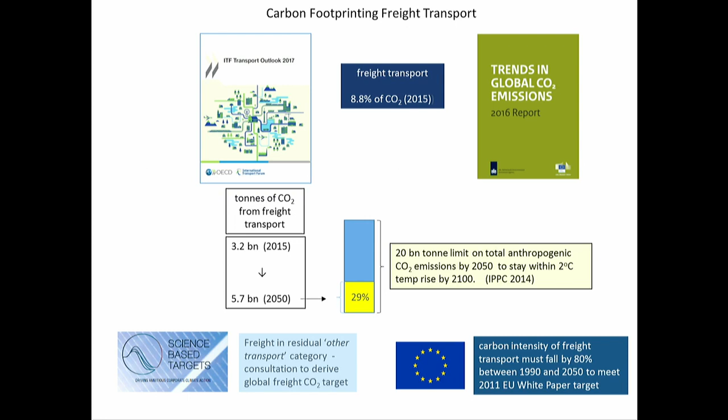Here in Europe, however, the 2011 White Paper on Transport set targets for decarbonising transport. Now, if the freight sector is to meet those targets at an EU level, then that will require an 80% reduction in the carbon intensity of freight transport between 1990 and 2050. And that is going to be a very tough challenge to meet. So that's the background, in a sense, to what we're talking about in this session.

Those of you who work in this area will know that there are various analytical frameworks that you can apply to try to determine how you decarbonise freight transport. The one that we tend to use is the one on the right there, which we call the Green Logistics Framework, which suggests there are 5 things you can do to decarbonise freight transport. You can reduce transport intensity, just reducing demand for freight transport. You can shift transport mode, you can improve vehicle load factors, you can improve energy efficiency, or you can switch to lower carbon energy.

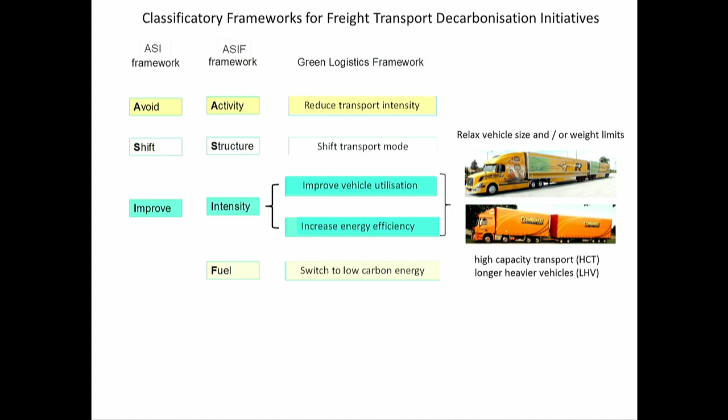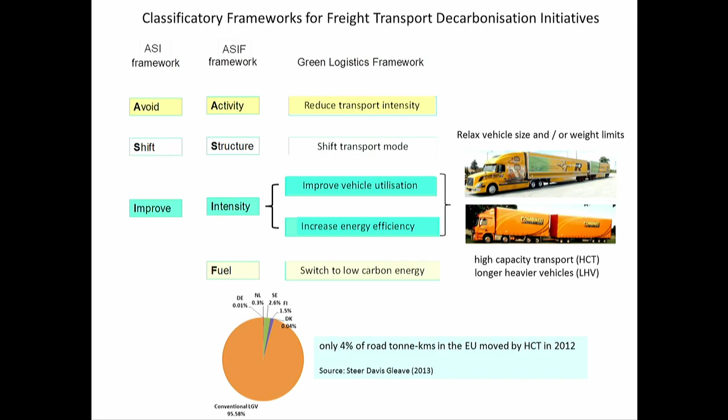Now, what we're talking about this afternoon, high capacity transport, really relates to two of those: improving vehicle load factors and also improving overall energy efficiency. The latest figures I've seen for Europe suggest that only about 4% of road ton kilometres move by high capacity transport in longer and heavier vehicles.

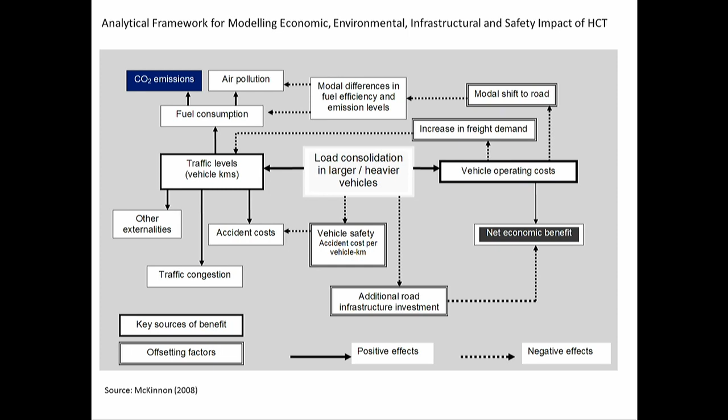So there's a big potential to increase that figure. Some years ago, I developed an analytical framework that you can use for assessing the costs and benefits of increasing the maximum size and weight of trucks. It's a rather complicated framework. Thankfully, this afternoon, I'm just focusing on one box in that framework in the top left-hand corner, just looking at CO2 emissions. So I'm not saying anything about other pollutants, about safety, about risk, and so forth.

So what could the contribution of high-capacity transport then be to the decarbonisation of road freight? There are various companies that make claims. A trucking company in the UK that's developed a longer, heavier vehicle claimed you can cut your CO2 emissions by between 8 and 16%. There have been larger scale trials in the Netherlands and in Germany, and they have been very positive. I've extracted some quotations from the relevant reports.

In the case of the Netherlands, for example, they said that for road transport, this is an important innovation in the effort to reduce CO2 emissions. And then more recently, as I'm sure many of you will be aware, the German government has approved gigaliners, longer and heavier vehicles, for general operation in Germany. And the study done by BaST again partly justified that decision on the basis of the carbon reductions that can be achieved.

The International Road Transport Union, in its report recently on the commercial vehicle of the future, makes some projections about the extent to which high-capacity transport can cut carbon emissions in the European road freight sector. So they reckon that by 2030, HCT could achieve about a 3.5% reduction in CO2 emissions, and potentially by 2050, a 7.5% reduction in CO2 emissions. Not huge, but nevertheless a significant contribution.

And then in the UK, a research centre that I was involved in, and David Cebon, the director of the centre, is here, did a project for the Committee on Climate Change in the UK, looking at all the ways of decarbonising road freight transport in Britain up to 2035. And they reckoned that by the early 2030s, up to about a quarter of the carbon savings would come from the use of longer and heavier vehicles. So a lot of evidence to suggest that this is a very positive way of decarbonising freight transport.

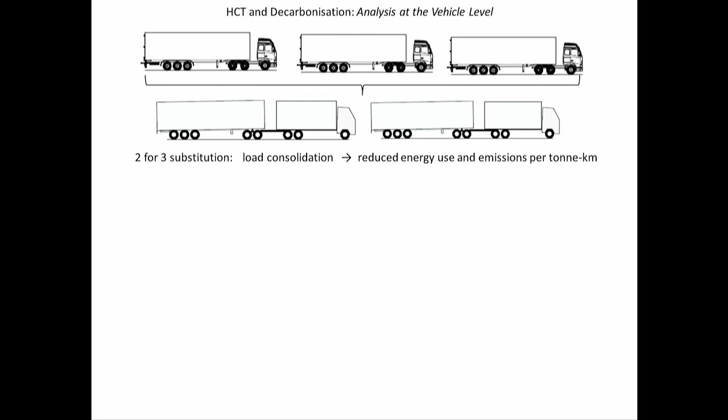Now, if we simply focus on the vehicles, things are relatively simple. I'm going to be talking mainly about the 25-metre longer, heavier vehicle with a carrying capacity of 50 or up to 60 tonnes. That would give you a 2-for-3 substitution: we can replace 3 trucks with 2. And that translates into greater load consolidation and improved energy efficiency per tonne kilometre.

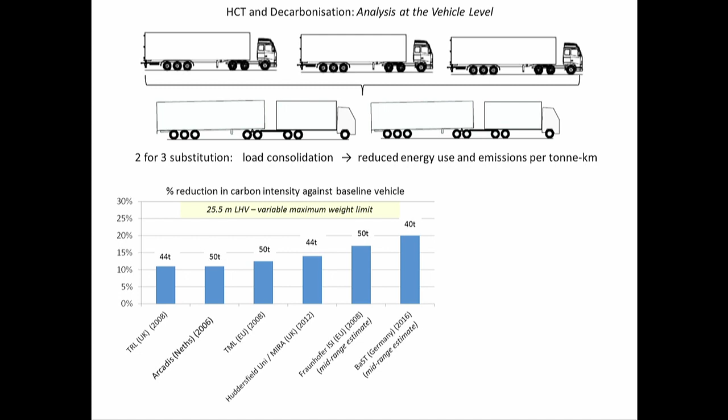If one reviews the literature in this area, again, there have been studies done in various countries, you can see that that would save between 10 and 20% of fuel consumed and also of CO2. It partly varies because different countries and different studies have used different maximum weight figures for these vehicles. So it's very hard to compare much of the data in the public domain because different methodologies were used, the geographical areas differ, some of the assumptions made about price elasticity. So it's hard to make an overall conclusion.

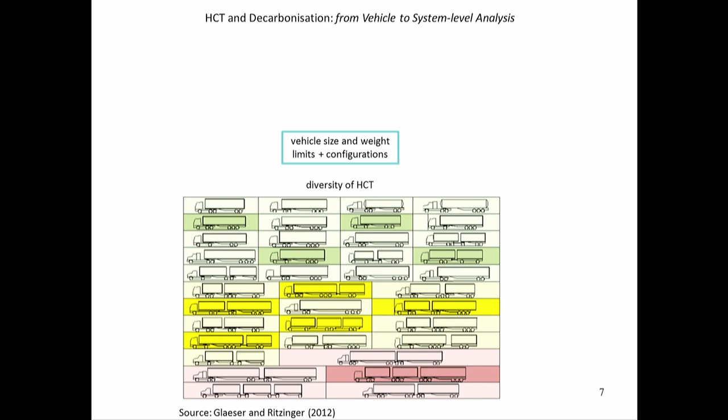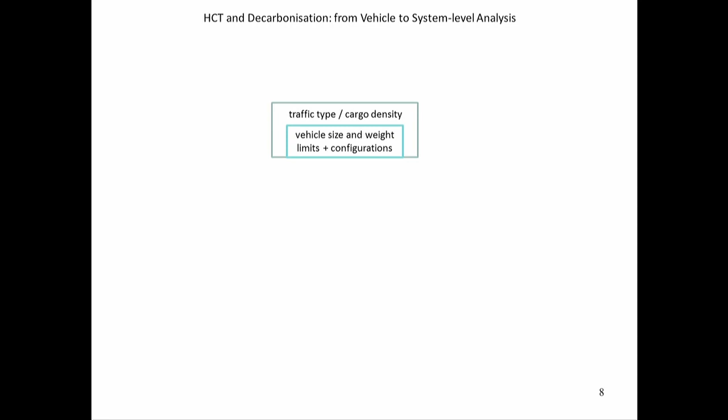But the other challenge is moving from a vehicle-based perspective to a system-wide perspective. If you allow this at a country level, what would be the macro-level impact? Why is that difficult? Partly because of the diversity of longer and heavier vehicles, a very heterogeneous set of possible vehicle configurations. The other problem is that the freight varies a lot. One of the key determinants of the carbon benefits you get is the density of the freight that's being moved and how that relates to the size and the weight restrictions as well.

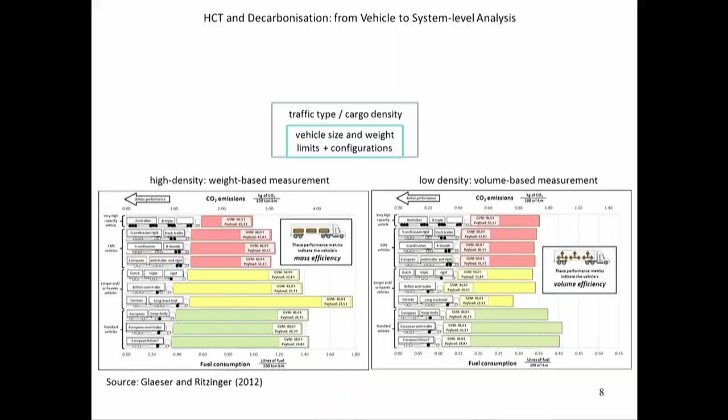Again, interesting work has been done in this area, partly in connection with the last OECD study on this subject, which was published back in 2009, where they looked at 39 different configurations of truck. Some of them the standard workhorse vehicle at the time, others high capacity or even very high capacity vehicles. John Woodrooffe, who will be speaking in a few moments, was one of the contributors to that study. They also came up with a nice metric, a composite measure of freight density that took account of both the cube as well as the weight.

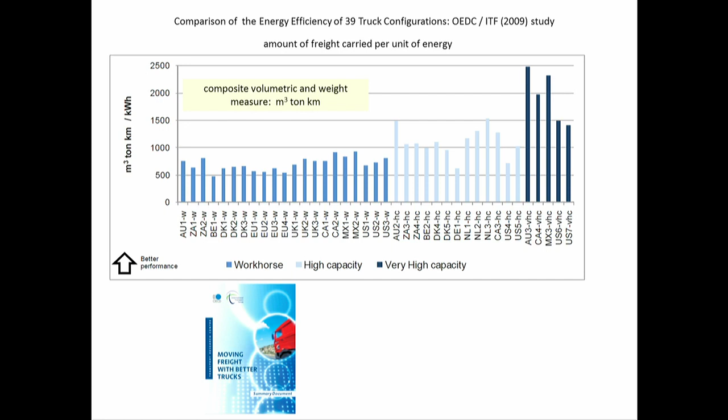This graph shows the energy efficiency of these different vehicles, and the capacity of the vehicle increases as you move from left to right. It shows quite clearly that the higher capacity vehicles deliver greater energy efficiency and reduce carbon emissions per ton kilometre.

The other problem you have in going from a vehicle perspective to a system perspective is the geography, because it's generally accepted that these longer and heavier vehicles will move on a more restricted road network. There's a possibility therefore that the journeys these vehicles make will be more circuitous. So if there are additional vehicle kilometres to be run, that will partly erode some of the carbon benefits.

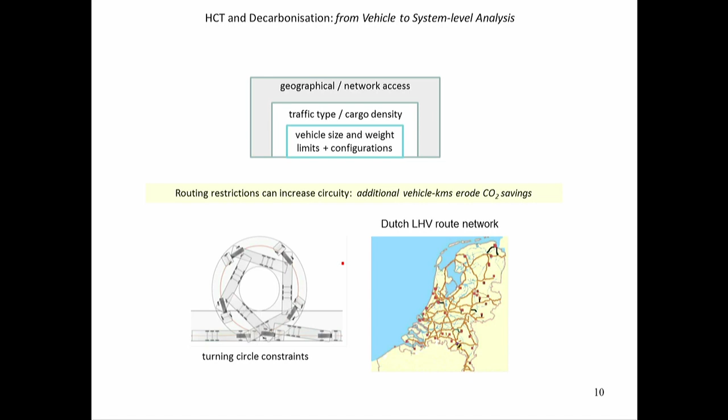So therefore we have to look at the issue of network access, which I think Chris will be addressing in his presentation later. Then pulling back further, in going to the system, we have to look at the freight market and the level of adoption of these vehicles, and also their impact on freight modal split.

Because, as I'm sure you're all well aware, these vehicles will make the movement of freight by road cheaper. It will improve its competitiveness, and therefore can divert freight from other lower carbon transport modes like rail or water.

I was involved in a study in the UK that looked into longer, heavier vehicles back in 2007, 2008. And we did a lot of modelling at that stage of the impact of longer and heavier vehicles on the freight modal split in the UK, mainly between road and rail.

And the results of that analysis depend very much on the elasticity values, the cross-modal price elasticity values factored into the model. But there's no denying that there will be some erosion of freight traffic from alternative modes.

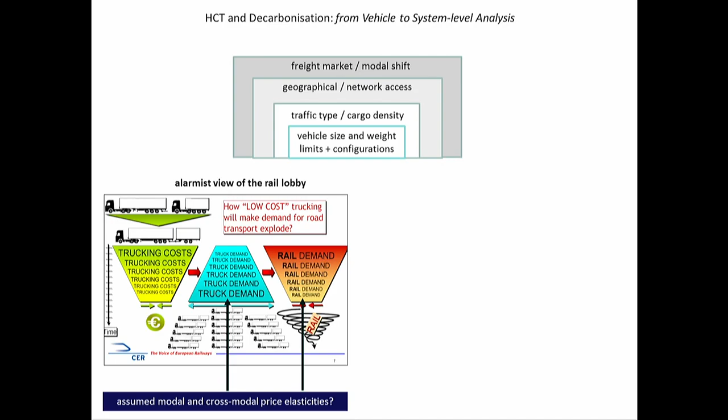Whether it will be as bad as the railway sector would like us to think is another matter. Clearly there's been a lot of lobbying against high-capacity transport by people on the railway side. I'm sympathetic to many of those arguments, but my feeling is that people have been exaggerating the cross-modal elasticities, and that this will not be as damaging to rail as people project.

It's also been argued that if we make road freight cheaper, companies will make more use of it. They will reconfigure their supply chains, and they will lengthen the distance the freight moves, and that will generate more ton kilometres. Again, the available evidence on that suggests that is unlikely to happen.

But critical to all of this are the elasticity values that you factor into the models. In connection with the project that Jerker mentioned, we ran a workshop in Cambridge back in December where we focused specifically on these elasticity values. They vary a lot by freight market, by country, by sector, and so it's very difficult really to generalize.

But I do flag this up as one of the controversial issues in the decarbonisation of freight transport, this conflict between, on the one hand, trying to improve the efficiency and the carbon efficiency of road freight, and on the other hand, trying to shift more freight onto alternative modes. These two things are in conflict, and it would be nice if we could find a way of reconciling that.

And then pulling back further, one has to look at how supply chains, logistics systems will adapt to the use of high-capacity transport, because that will influence the uptake of these vehicles, the extent to which loads migrate from the existing vehicles to these longer and heavier ones.

It will also relate to the capacity utilization, because a lot of the models here assume that the trucks will be full on every kilometre they run, and clearly that is not the case. So again, we've got to have realistic assumptions about how well that extra capacity will actually be used.

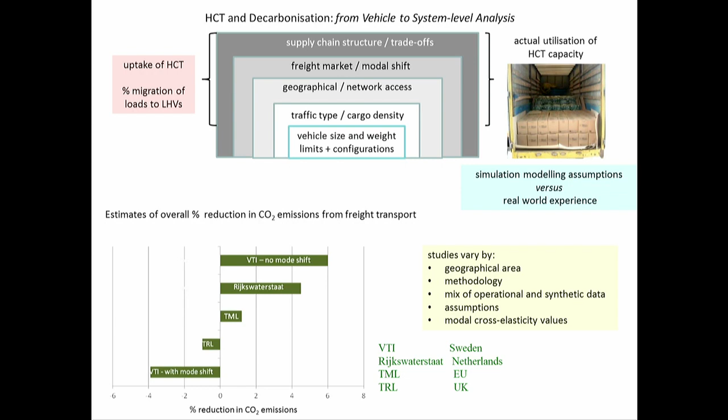Anyway, if you factor all that together, there are a few studies I came across which have tried to look at the effect of high-capacity transport on freight transport CO2 emissions as a whole. Again, the results vary, for the reasons I've mentioned earlier, because the studies were done in different countries using different methodologies. Overall, it suggests you can get between a 2 and a 6% reduction in your CO2 emissions by moving to high-capacity transport.

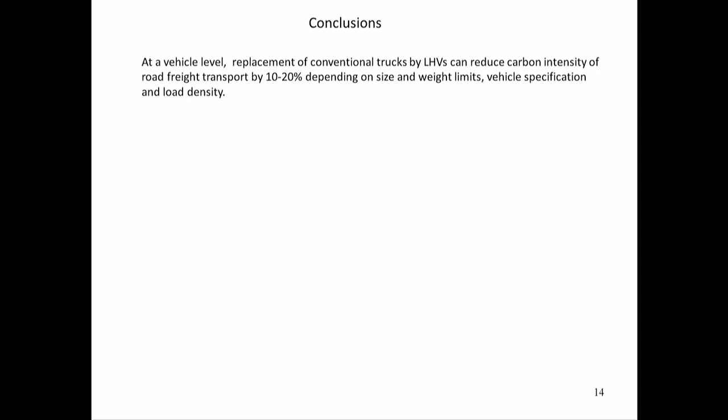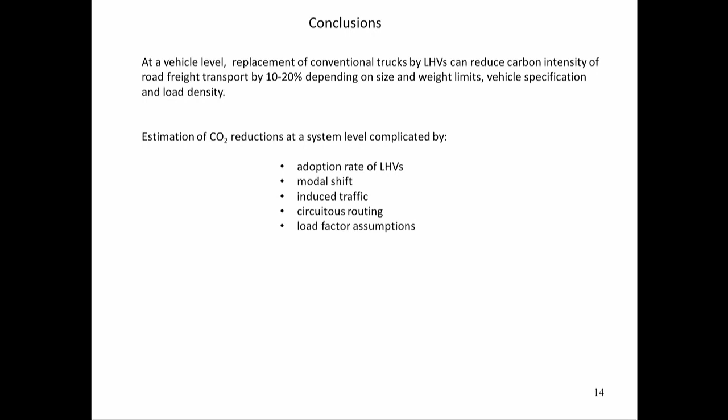So just to conclude with a few general points: if you simply focus on the vehicles and the vehicle substitutions, you can be getting a 10 to 20% reduction in CO2 emissions per tonne kilometre. It's hard to go from the vehicle to the system level for the reasons I've mentioned, because you've got to make assumptions about adoption rates, modal shift, vehicle load factors. But on the basis of the available data, it would suggest you can get about a 2 to 6% reduction in CO2 emissions from freight transport as a whole.

Just one other point I'll make before I end. If you review all the studies that have been done, you can divide them into two categories: those based on theoretical modelling and simulation, and those based on real-world experience. The latter category suggests the CO2 savings are greater.

They're therefore, to my mind, the more credible of the studies done so far. So to conclude overall, it seems to me that high-capacity transport can make a significant contribution to the decarbonisation of road transport and also transport in general. Thank you very much.

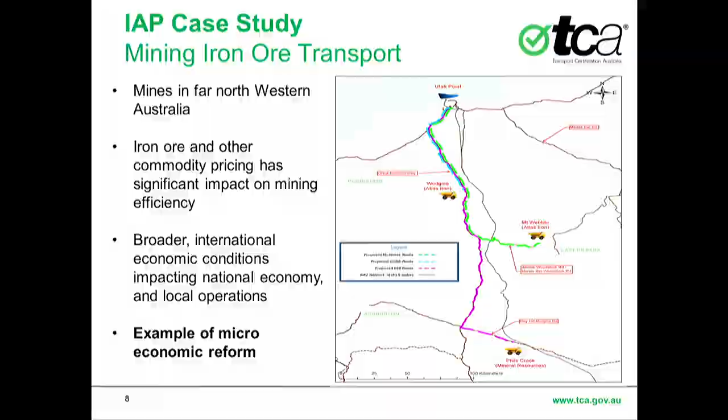I will give you 2 examples of this in use. This is the first one. This is an example, I'll be very quick, of microeconomic reform. Because ultimately, why do we have these bigger trucks? Because they are dealing with an economic problem. This is a site of a mining location in Western Australia, 3 mines. The drop in the iron ore commodity price effectively made these mines uneconomic. In other words, the cost was greater than the floating price of iron ore.

So the government of Western Australia was faced with, well, let's just close them down. But the economic impact of that, the social impact of that was significant. They also determined that the land cost of the mine, in the worst case 400 kilometres to the port, represented the most significant cost. As soon as it got onto the ship, it was irrelevant, but getting it to the ship was the most expensive cost. In WA, they have very large trucks, and the largest vehicle is a 53-metre long road train. Even that was uneconomic. In other words, it wasn't big enough to make these mines economic.

So the Western Australian government decided we will use IAP and effectively have the largest vehicle on the public road network.

A performance-based standards vehicle, super quad, 60 metres in length, 199 tonnes gross vehicle mass, 144 of those are payload. It operates 24/7 on the public road network. It is monitored and it has a maximum speed of 90 kilometres an hour.

And I can assure you, as I've been sitting here, every 3 seconds in Melbourne, the data is being received to confirm that, and it's used. Prosecutions occur. It's also monitored for headway compliance. In other words, 2 vehicles can't be closer than 200 metres, because if they are, no one can overtake. And that's monitored as well.

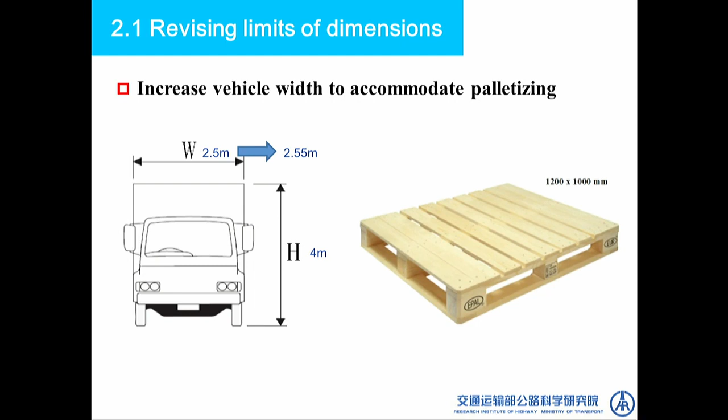In the newly revised version of the standard, released last year, there are a lot of changes and improvements to the limits of size and the interchangeability of the trailer, and so on. For the limits of vehicle size, for example, we have increased the width limit by 5 centimeters, in order to accommodate two pallets side by side.

For the length of the vehicle limit, we have made a lot of improvements. For example, for the single vehicle, we have unified the length limits of all single vehicles into a single standard of 12 meters.

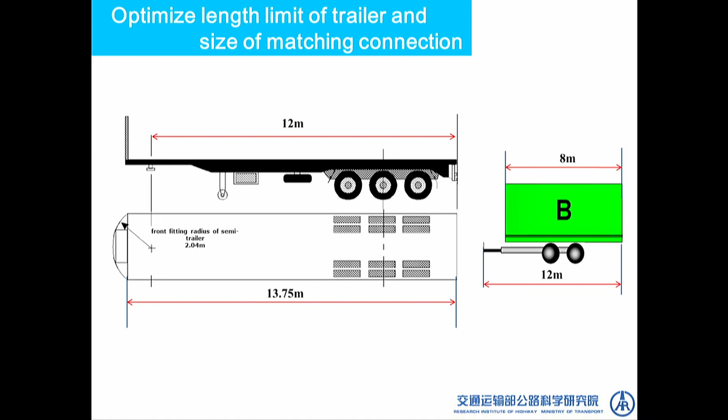And for the trailer, semi-trailer, and center axle trailer, we have also optimized their lengths. Especially the center axle trailer is newly added in this version of the standard, which will be very helpful for China to apply trailer swap applications.

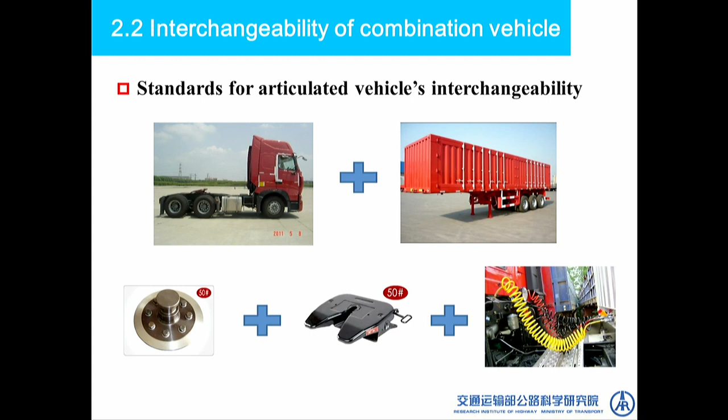For the interchangeability of combined vehicles, we have improved the specifications for articulated vehicle interchangeability.

Now we are trying to set up a subsystem of standards for articulated vehicle interchangeability. It will be composed of 9 standards together—7 of them have already been finished, released, and applied, and 2 others are underway, referring to the ISO standards.

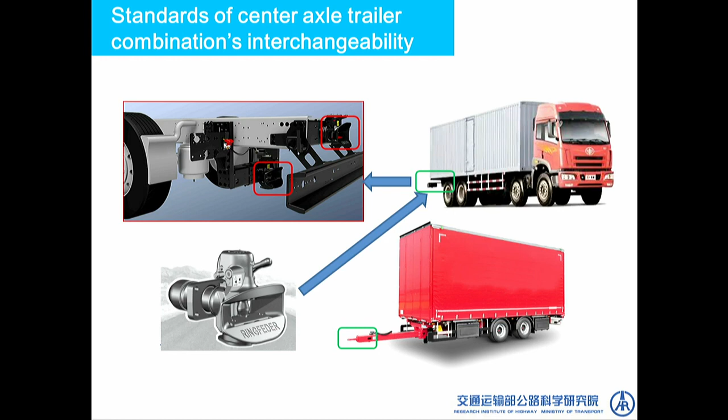The center axle trailer, as I mentioned, is newly added in this version of the standards, so we referred to the ISO standards a lot to make our Chinese national standards. We are also trying to form a subsystem of standards for center axle trailer combination interchangeability. It will be composed of 10 standards—5 of them have been finished and released, and the other 5 are also underway, also referring to the ISO standards.

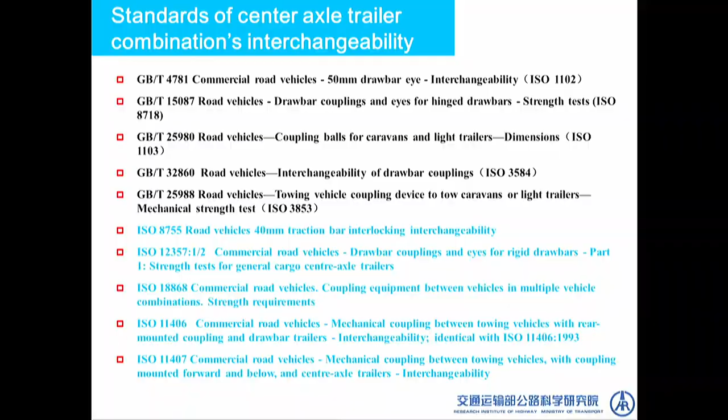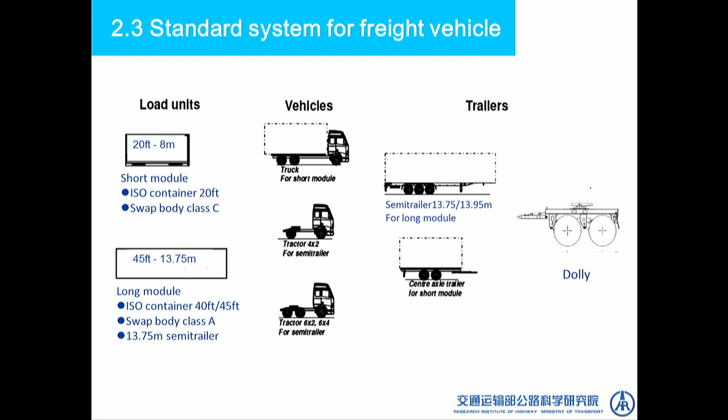The two examples for the limits of the size and the interchangeability standards are only two examples of the new version of the standards. Based on the standardization improvement for the past few years in China on freight vehicles, we are trying to set up a standard system for the freight vehicle overall, including the standard load units, the standard tractor vehicles, and standard trailers. Using the different load units, tractors and trailers together, we can combine different types of freight vehicles according to different types of transportation demand.

Here are the three standard types of freight vehicles: the ordinary goods vehicle, the articulated vehicle, and the center axle trailer combination. Because, as I have mentioned, the center axle trailer combination is new in China. Before, we didn't have this kind of freight vehicle. So in the process of standardization, we have performed a lot of tests for the comprehensive performance of the center axle trailer combination, of the two types, including the car carrier.

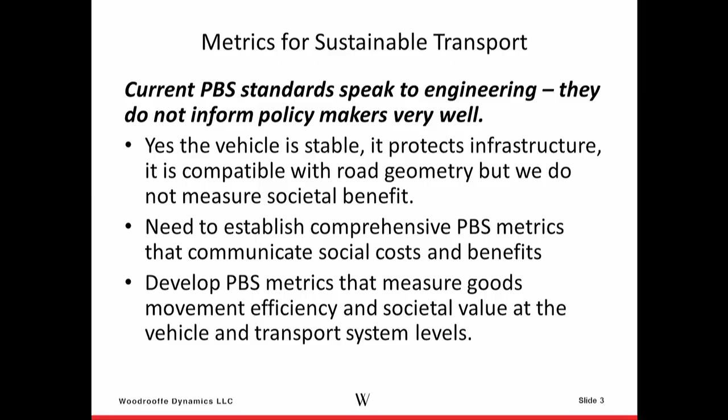So the metrics for sustainable transport: obviously the current performance-based standards really don't address that very well. Yes, the vehicle is stable, it protects the infrastructure and so forth, but we need to establish comprehensive metrics that deal with the societal costs and benefits, and also measure the efficiency of goods movement, because it's not good enough just to have a high productivity vehicle. You have to be sure it's being used to its potential. Here's a good illustration of the approach of two different countries. Canada allows the Canadian B-train to operate on all truck routes, so it's a fully accessible vehicle. Compare that with the US tractor trailer, and this is as big as you can do in the US.

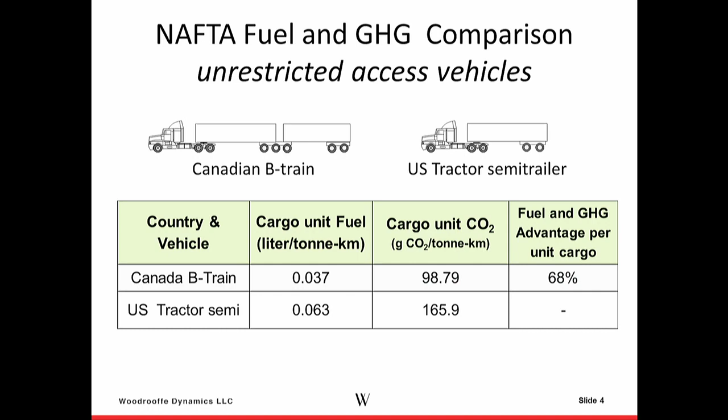So the Canadian B-train has a 68% productivity advantage over the US counterpart. That's an enormous benefit. So we want to think about how we can better construct arguments to help support policymakers in their very difficult job of convincing the public that this is the thing to do. And I must say that policymakers need to be convinced themselves.

So some of the opportunity cost parameters that we might want to consider are things like traffic casualties. We know, for example, that crash frequency is directly proportionate to the distance traveled by any vehicle. So if you can improve your efficiency, reduce the number of kilometers driven, then you will get a commensurate reduction in crashes, which is a safety benefit. We need to think about the broader health effects, respiratory disease and so forth. Our duty to the planet for decarbonization and reducing emissions.

We have to consider mobility, the issues of congestion and lost time, and how we can utilize freight transport efficiency to help improve that. Infrastructure consumption: we often think about bridges and roads as being the family jewels, let's not damage them, let's not use them. But really, they are the tool of society. They are what allows us to be productive and efficient and prosperous.

And then we also have to think about the larger issues of economic impact on business and commerce and international competitiveness. I think of the Australian example that Chris gave about a mine that was not really feasible because of the low cost of the ore, yet if you could improve your transport efficiency, then that becomes something that's useful. And the last point, of course, is sustainability. Whatever we do, we have to drive that.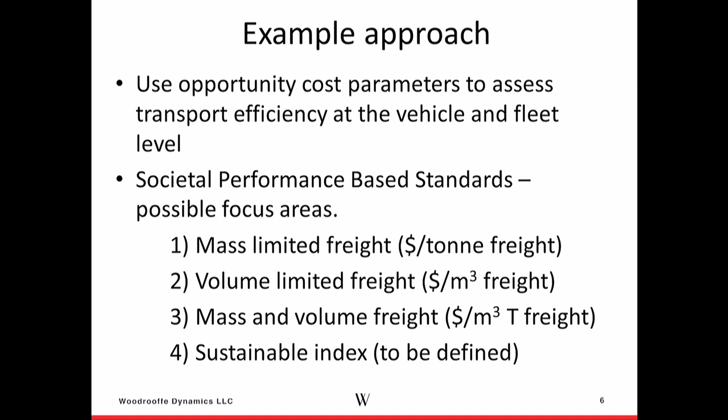So an example approach might be to use opportunity cost parameters to assess transport efficiency. We talked earlier about mass-limited freight. So say you were going to haul building materials. That vehicle is going to be fully loaded before the cubic space has been utilized. Likewise, if we have low-density freight, for example pillows or insulation, that vehicle will be utilized before the mass limit is realized. And so it drives us to the notion of a mass volume freight index, where, when we think about our logistics systems, we want to utilize the volume and the mass capacity of any given vehicle, which means we start hybridizing freight, making sure that we have reached the GVW of the vehicle, but also the cubic capacity of the vehicle.

And this is a systems approach to transport that the LTL, or less than truckload freight companies, have been doing for years, but we have to move in the future to better utilize vehicles, and therefore that's a real challenge to our logistics community. And then the question is, is there a sustainable index that might drop out of this? Because we want to be able to deal with some kind of confidence that we're using the system of transport in the most efficient way.

So we know we have vehicle compatibility standards that speak to vehicle stability, trailer dynamics, the powertrain, et cetera. And then the societal value metrics within the policymaker toolbox would include things like safety. How would this new vehicle system or this new efficiency improvement translate into lives saved? What are the benefits at the public health level? What are the benefits for congestion, decarbonization, infrastructure consumption and economic impact? This bottom set is the metrics that we want to include in the toolbox for policymakers.

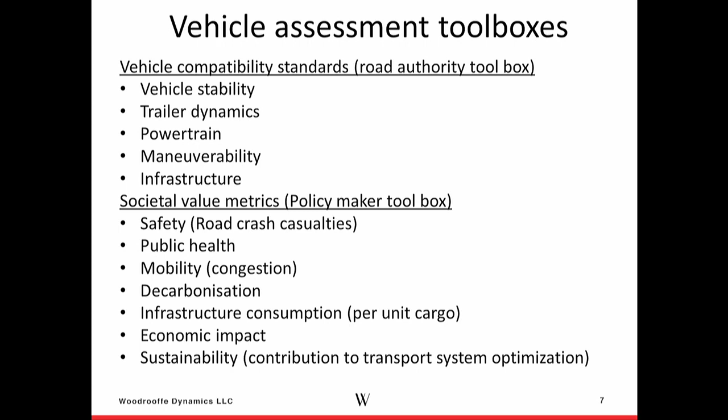And I stand before you with an incomplete study on this. This is part of the reason that we're doing this in the project. And it is a lovely project because it's international in nature. Policy matters are not just an independent sort of element. They are different in every jurisdiction. So we want to have all the input from various countries and the various priorities that they have. So the toolbox needs to be generic to the extent possible, and each country can fit its own rules to that. That drives us to defining the particular metrics we wish to choose, and then we leave it to each country or territory to assert the criteria they feel is appropriate for their conditions.

Again, sustainability. Can we develop a sustainability index, and can a universally applied sustainable index be achieved? We need to think about modal compatibility because we want to think in terms of a transport system, not just the vehicle. We want to think about the ship. We want to think about rail. We want to think about alternative forms of transport.

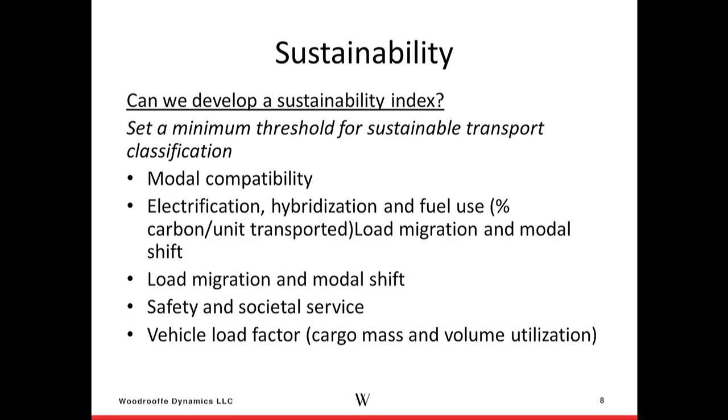Electrification, hybridization, those sorts of things. In fact, as we create this toolbox, we can't think about today. We have to be thinking about tomorrow and very far in the future in order to ensure that we don't inject unintended consequences and have artificial elements that may produce negative returns. So we have to be very thoughtful and careful about how we do this.

We also want to encourage load migration, say from smaller trucks to larger trucks, so that we get fewer truck miles at play. And also we have safety and societal service issues. And as I said before, the vehicle load factor, I think in the future, this is a big one. Once we optimize our vehicle system, then we must find ways to be able to utilize those vehicles.

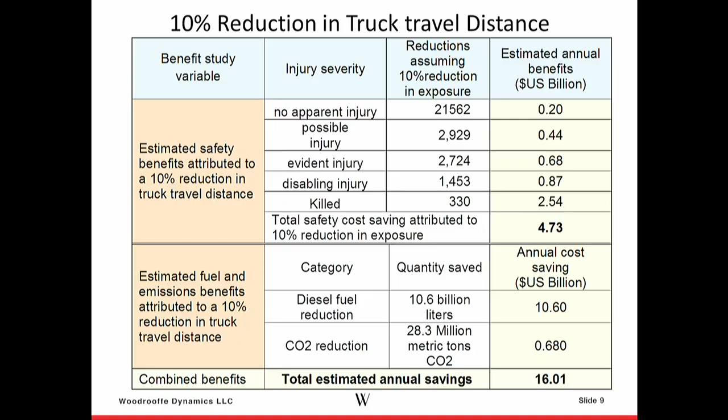But if you could reduce the truck travel distance through improved transport efficiency, then we would save something in the order of 330 lives per year. You can see that close to 20-some thousand crashes could be avoided. You would have a significant reduction of fuel and significant CO2 reduction. And it rolls up to $16 billion annually. So that's $16 billion every year, just for 10%, and that goes year after year after year. So that's a compounding benefit, that's an opportunity cost facing us at the moment.

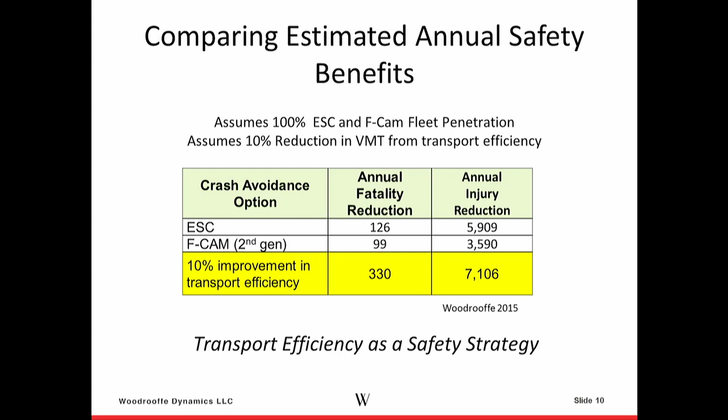And then this last slide, I want to put this up just to illustrate how powerful freight efficiency is in terms of a safety strategy. So I have here a table containing 2 crash avoidance technologies that have been mandated in Europe. One is electronic stability control. If that were put on every truck in the US, we would save about 126 lives per year.

If we put forward collision avoidance and crash mitigation, so autonomous braking devices on all trucks, we would save perhaps 99 a year. But if we simply improve our efficiency by 10%, we're looking at 330 lives. So really, transport efficiency is a surrogate for safety, and it is more powerful than some of the modern technologies that we're looking at today.